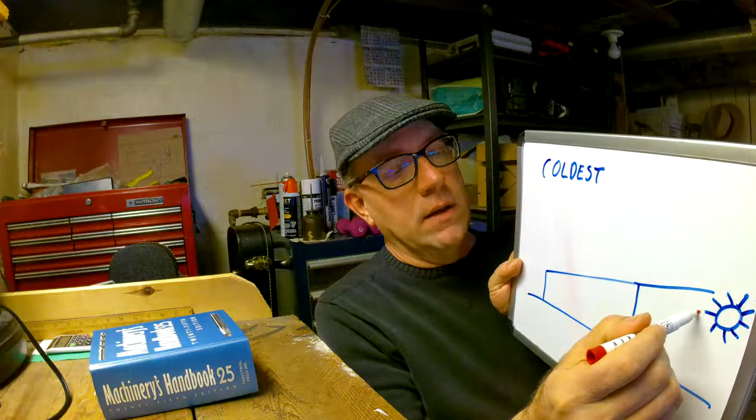It is designed with the thinking that on the coldest day of the year, that's where you want to have this basically all-glass, or mostly glass roof, and you can design the angle of the roof so that the sun's rays can go all the way to the back wall. So on the coldest day of the year, the sun's rays go all the way back to this wall, and that wall can get heated up, and then the heat can stay within the building. That's the idea there.

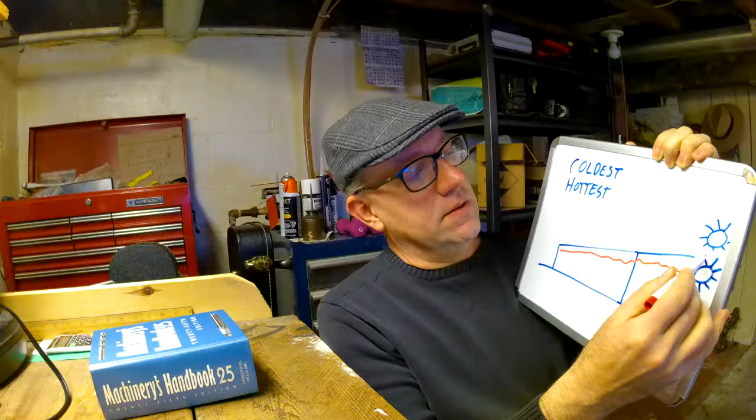And it's also designed so that on the hottest day, the sun might be higher up in the sky. We're talking North America here, I guess it'd be higher in the sky in South America too, but whatever. So we've got our sun up here. Because that's the hottest day of the year, we don't want all that sun coming into our hangar and heating it up, making it a hard place to work and cooking our planes. So on the hottest day of the year, it's covered, it's shaded by this little awning that comes out. So that's some pretty crooked rays, but you can imagine that it's straight.

So yeah, you know what, I looked all over the internet and I just couldn't see any building designed exactly like that. And the thing is, we have the technology now to make this. That roof is looking at just kind of a cross section. Ideally the roof would be curved because the sun comes up and goes down, but that's just a slice in the middle of it - the highest point of the day in winter, the coldest day, and this is the hottest day here.

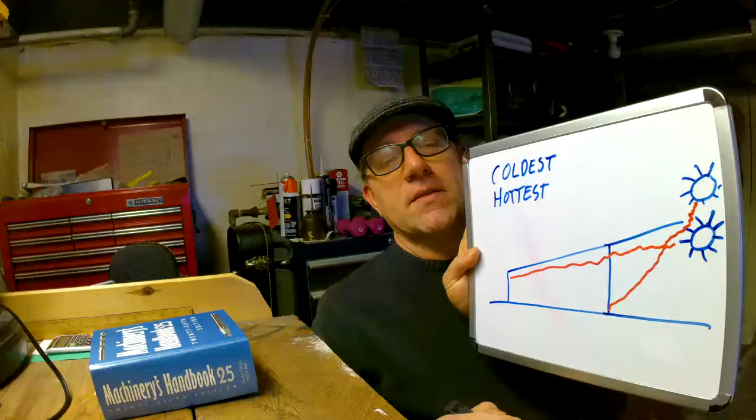So around Windsor, I did some research. The coldest day here is January 29th. Statistically, I found this map that tells you the range of the coldest days of the year - it's like this map of the United States. I just used Detroit because it's right across the river here. And then there's another map from NOAA, the National Oceanic and Atmospheric Administration, something like that - I'll put a link to that after the show. So the hottest day here is July 13th in Windsor.

Now, you would think that you would want to have the most amount of shade around this upcoming June, where it's the actual longest day, the sun's highest in the sky.

You'll notice that after the shortest day and after the longest day, it takes about a month for the temperatures to all kind of catch up. So ideally, what you want is lots of sun coming in on the coldest day. Usually in winter when it's really cold, it's some kind of high pressure system, so there's not a lot of moisture in the air, meaning it's usually pretty sunny on the coldest day. Perfect for heating up a hangar, which has never been built before, I'm telling you.

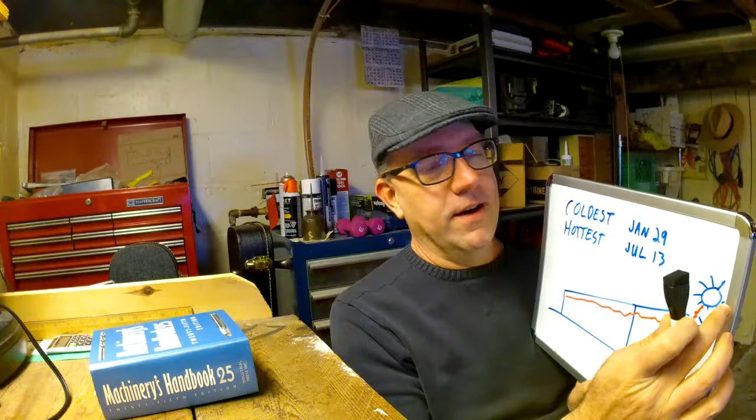People have done different types of roofs, they might hang out a little bit, but in my perfect Wilson roof, when the sun's highest on the hottest day, you get nothing. On the coldest day, everything. Okay, so that's the plan.

How did I figure out how big that angle is? All you civil engineers and architects, feel free to steal this info. It's not that hard, it's just a quick Google search away. I found that for my latitude there are sun calculators - you can just Google sun calculators, put in your city, and it'll tell you where the sun's going to be on a given date.

So, right, where are we here? On the coldest day, the sun would be at an angle of 28 degrees. Okay, so let's do 28 degrees here. How can we do this?

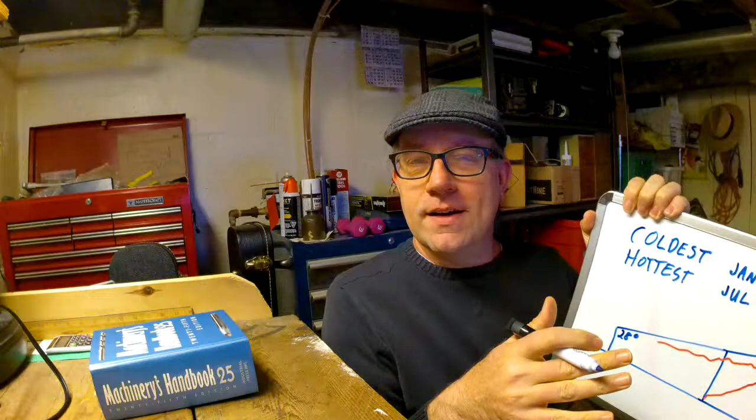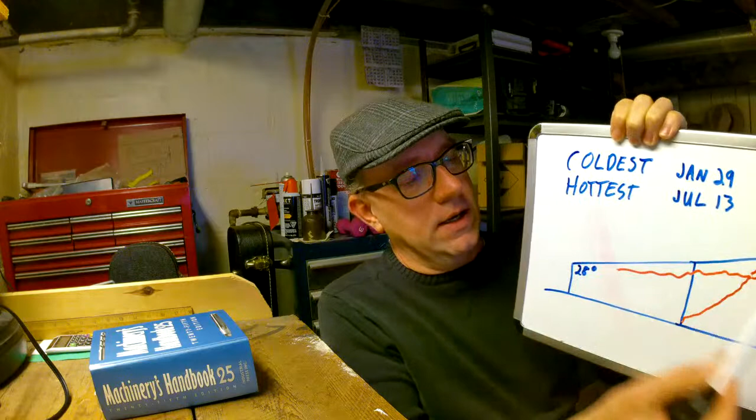28 degrees - now there's azimuth and there's height, so this is in height. Azimuth is some other kind of weird polar stuff, but you can feed it all into your CAD, AutoCAD, and figure it all out. So what we'd want is a roof angle of 28 degrees, and when the sun is at 28 degrees on the coldest day, all that sun's coming right in.

Then on the hottest day, we got - what was that? Yeah, I got my marker here still. So that little red stuff's going to the sun - that would be 58 degrees, we'll say here. Okay, this is going to be - I didn't really plan on how to do this - but we'll say, alright, this is 58 degrees here. 54 degrees, let's be accurate here. So we got 54 degrees, our angle up to our sun, and then 28 over here.

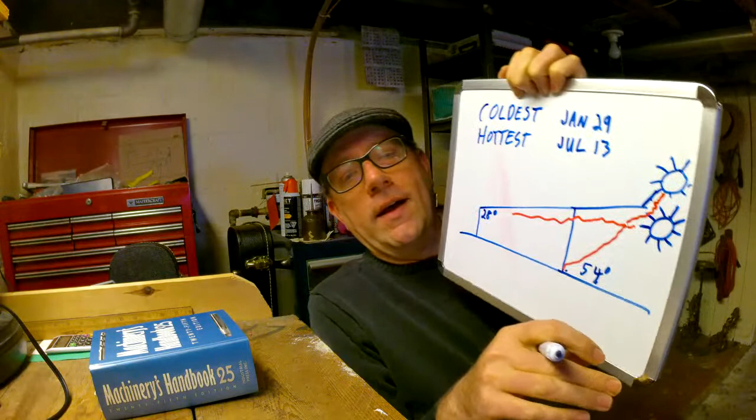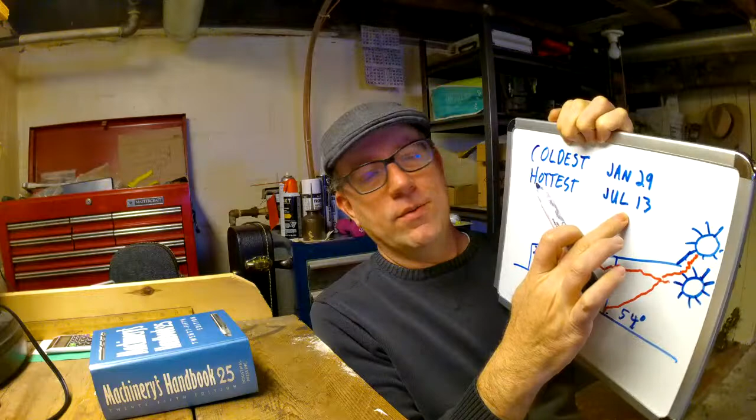If we have it extended out enough there, we get no sun at all on the hottest day, which is July 13th - where's the sun going to be? 54 degrees up. Okay, that's the Wilson roof. Feel free to use it, I've never ever seen it used that efficiently before.

Now, it would also be a strange looking roof because of the sun, I don't know. Here we go, here's my roof. Where's my arts and crafts here? I didn't really practice this, but we'll see if it works.

So if your roof is going to be - the sun rises, where does it rise? East, and sets in the west. So your roof is going to be kind of shaped like that, but it would also have to have some kind of curve on it too, like a compound curve, like that, and this would have some kind of curve there too. So that would meet the definition of the Wilson roof.

I was thinking about this a while ago - it'd be kind of cool to get a farm and grow garlic because it's real easy to grow. Oh, hey Rich. So I was like, okay, well if I could do this, I could do...

I was thinking maybe about greenhouses for vegetables and stuff, because I was thinking about moving up north, but then all the real estate got really expensive and I was like, okay, can't afford that. Then I thought about it more and it's like, you want to be a farmer? That's a lot of work. So anyways, glad I didn't do that.

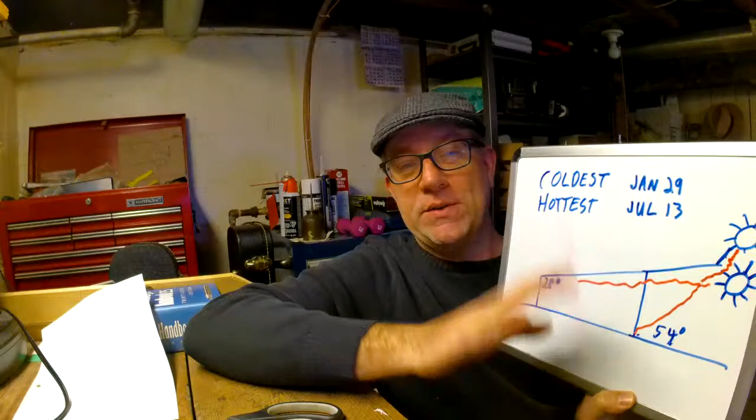But still, even if it's weird and wonky looking, that still meets my requirements. Also, if you're way up north, this basically wouldn't work. Around the Arctic Circle in the summertime, the sun's directly overhead and it's sunny for like 22 hours, and then in the wintertime the sun barely gets up over the horizon before going back down. So it's not really practical for that type of latitude. If you're way up north, just get yourself a heavy insulated box or something, and then a monster igloo.

And if you're down south, close to the equator, I haven't been too far south—most south I've ever been is Cuba or something like that. The nights are a little longer there, so that would work for some places, and it's always warm down there anyway, so you'd probably just want lots of shade.

But for around where I live, in the Midwest in the United States or Southern Ontario, or probably anywhere else, the Wilson roof would work. And no one has ever built it before. If you ever do that, you'll be the very first one to make the Wilson roof. You can do it, because I'm not going to—I got a garage, I got a house. I don't need any sheds or anything too much.